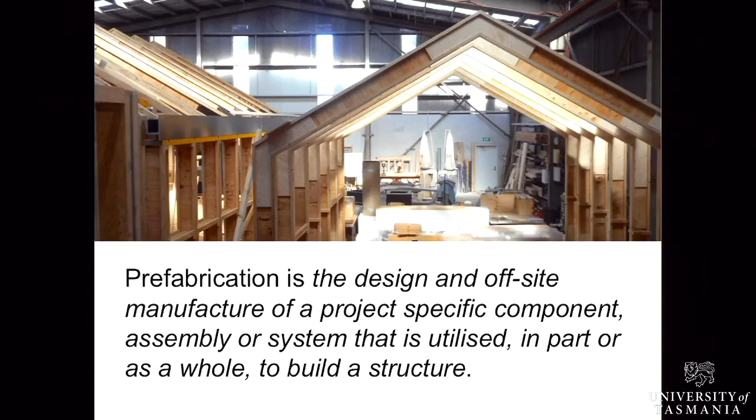So I think as we start, I'd like to begin with a definition, and that is what prefabrication is. So it's the design and off-site manufacture of a project-specific component, assembly or system that's utilised in part or as whole to build a structure. Now, a key thing about that is that it's done off-site. So you're not making it on the location where you're going to use it. Being built off-site means that you have greater potential for quality control. It doesn't mean you'll use that potential, but you've got it, because you can do things in a controlled environment.

You're making the piece to go into a project, so it's not a commodity. It's not like a piece of plywood that you buy at the shop or a pack of pine. It's something where someone's made a decision and cut a component that can go into your building. That also implies then that it's more precise than what you've got in on-site construction, because you're making it to a size that's determined by the design, and that you're then transporting that thing from some location where you've made it to the site where you're putting it together and putting it in place. Now, you may make parts of it in one location, assemble it near the site and then lift it up as a component. So we can look at some of those things as we progress through.

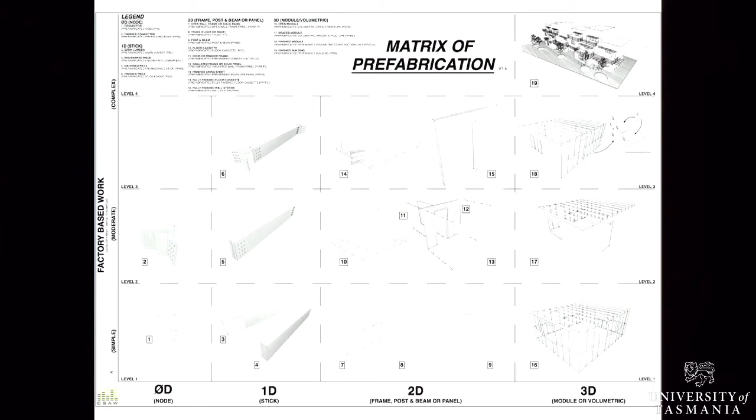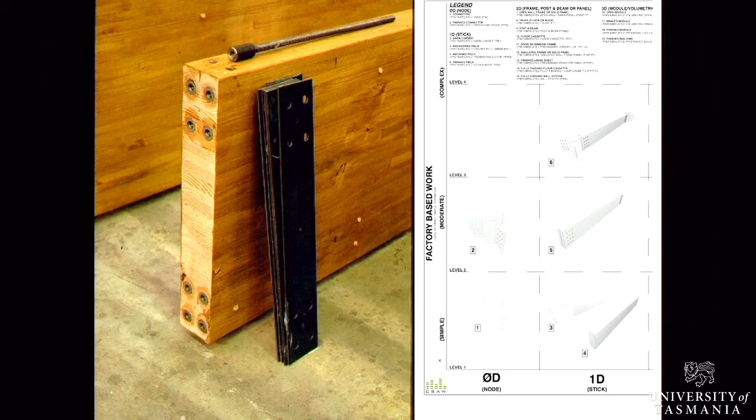So if we just look at some examples, this is a 1D element. This is a prefabricated glulam element that actually ended up in a building built for the Sydney Olympics. It was all cut to size, perfectly arranged, arrived on site, and then was just bolted into place. These are 2D elements. These are ganged nail plate trusses put in location in the School of Architecture building. So you can see that that's a 2D bit, and all those 2D bits are then made into some 3D arrangement.

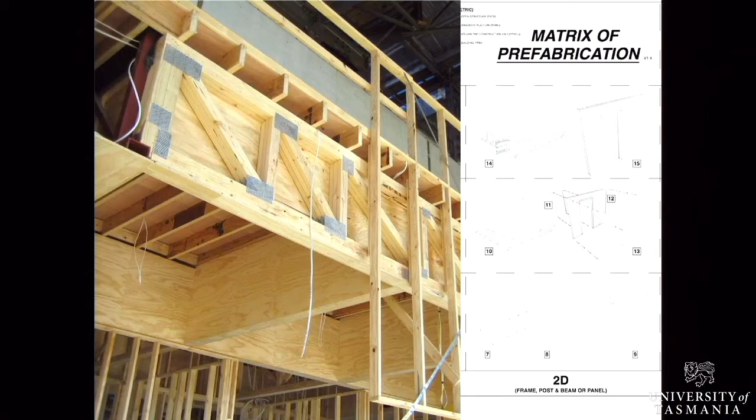And this is our volume. So this is one of the modules designed for the NRAS project. This is the prototype. It was manufactured and tested. We drove it around, and this is it being loaded off. So this is the type of thing we can fit into this site.

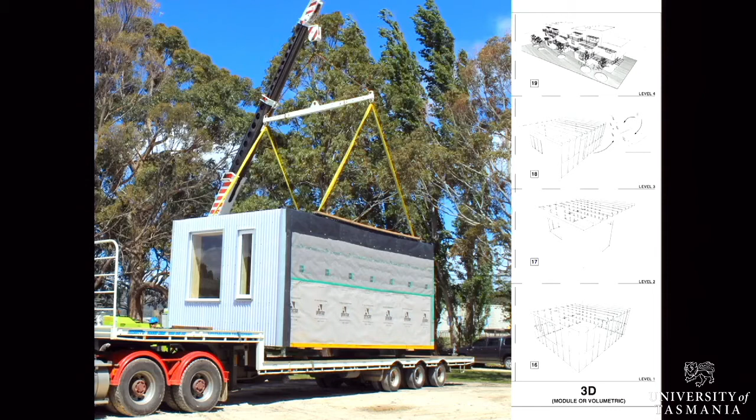Okay, so there's notable exemplars of prefabrication and timber prefabrication in Australia, but timber prefabrication is still a relatively underdeveloped art in Class 2 to 9 buildings in Australia. And that's one of the reasons to hold this seminar, is that we want to develop that art.

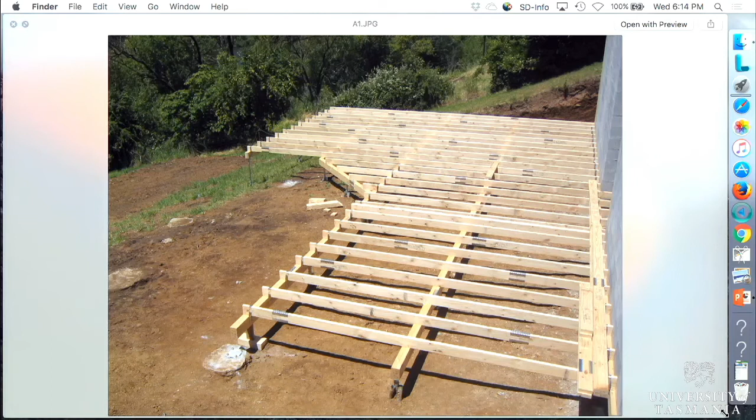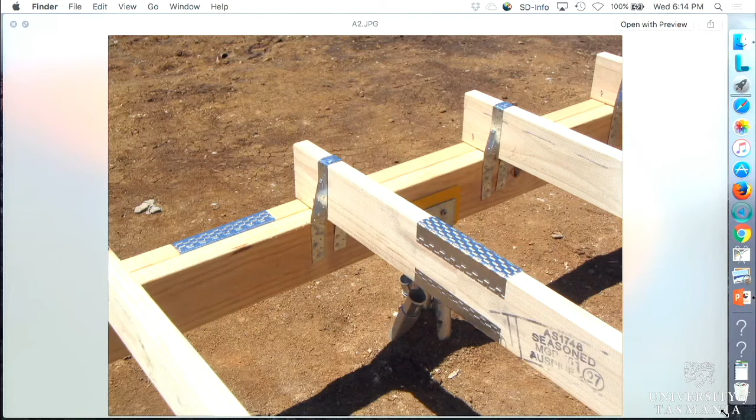I'm probably going to take you through the simplest forms and getting to fairly complex structures that we can do tonight. Basically, our simplest form of prefabrication is grabbing 2 sticks of timber and lengthening them. And this type of prefabrication has gone out the door because products like hySPAN and hyJOISTs, etc., have taken over from those types of prefabrication.

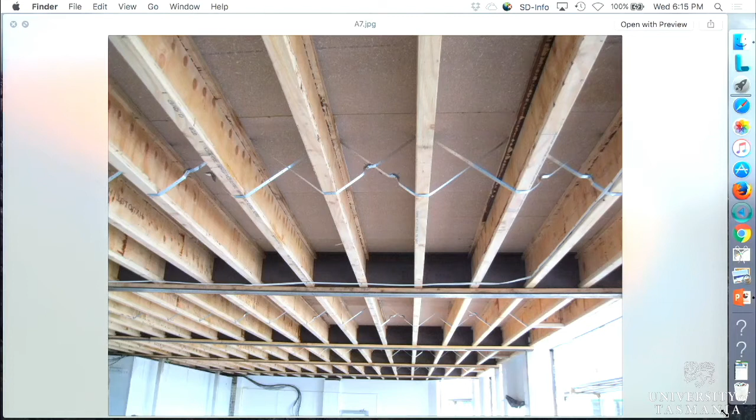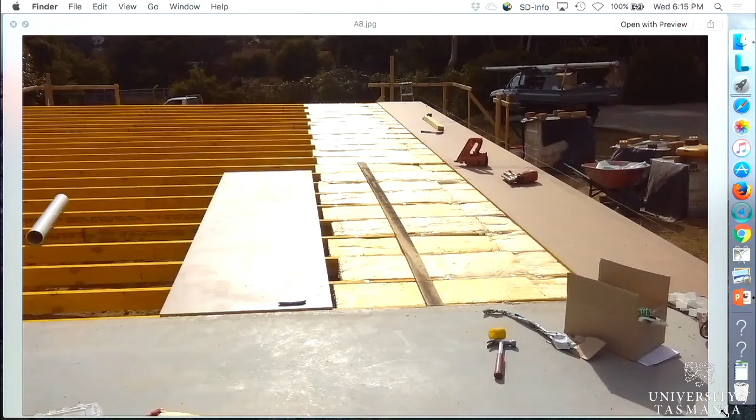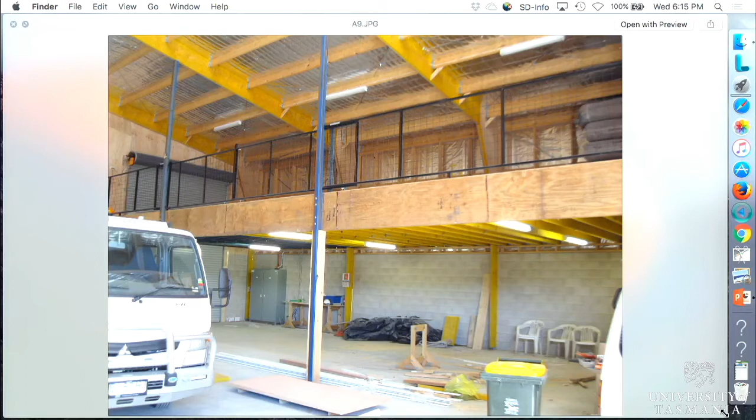And then we see on-site situations where you can either do this as a panelised and lift it into place, or make it together on site. Simplicity of continuous length members, such as this, with high span, and you can slip your insulation in while it's being constructed. And then we've gone to a storage building, and as you'll see there, we have fairly chunky pieces of timber, but that's also because we've got a lot of commercial loads on it as well.

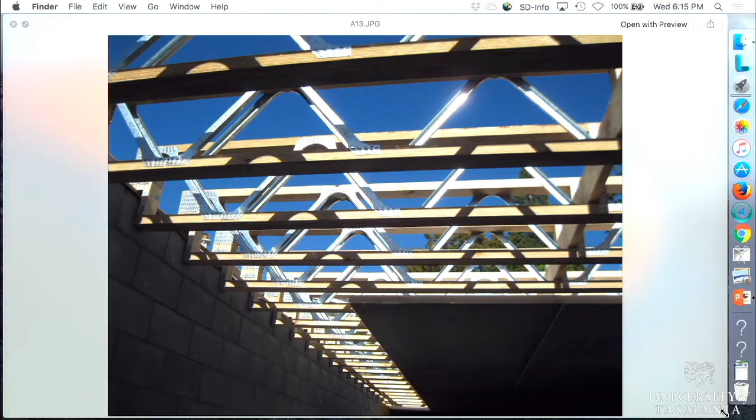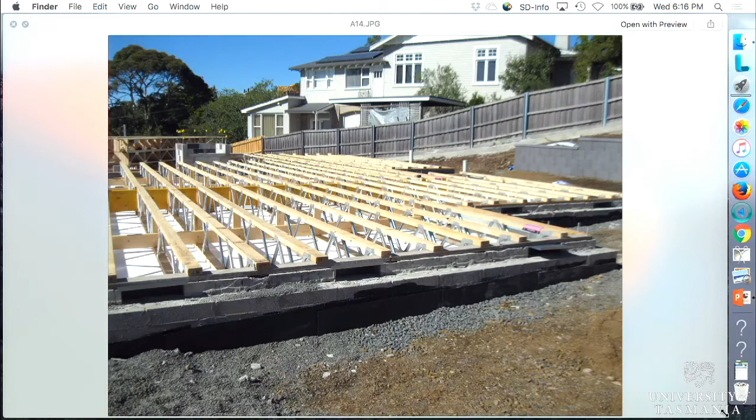And then we get to steel web floor trusses, which today are starting to take over from the timber ones. And the reason that they're taking over is a commercial factor, which is that they're around about $3 to $4 a linear metre cheaper to produce and place in the marketplace than the full timber ones. So I'm just calling out some of the realities of what we're facing every day with our customers.

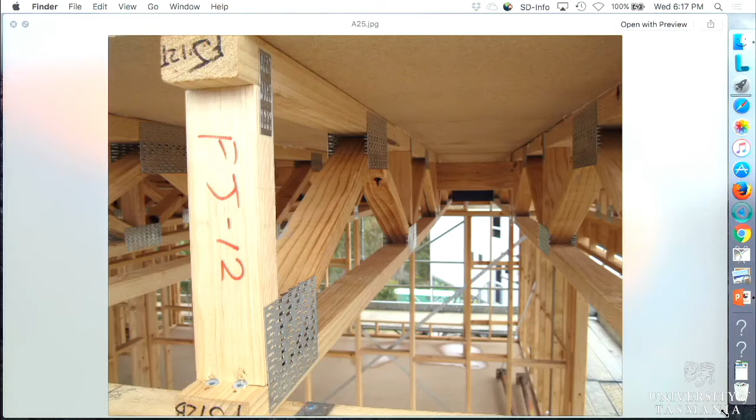And we also do floor trusses and put Hebel concrete floor panels on them, etc. So we take all of those types of things into consideration when we actually do the design. And that's looking underneath at a Hebel floor, sitting on timber trusses.

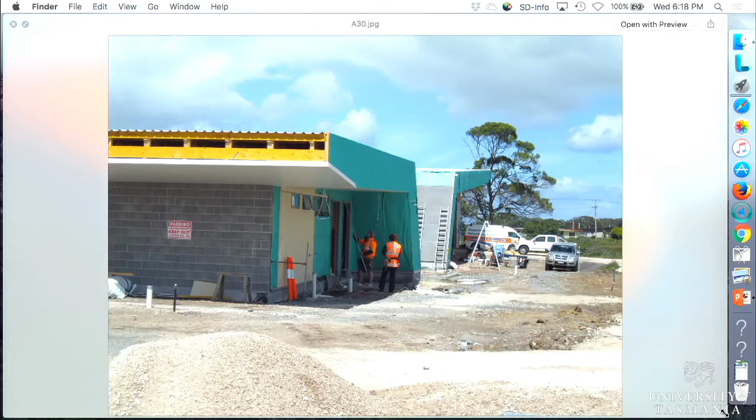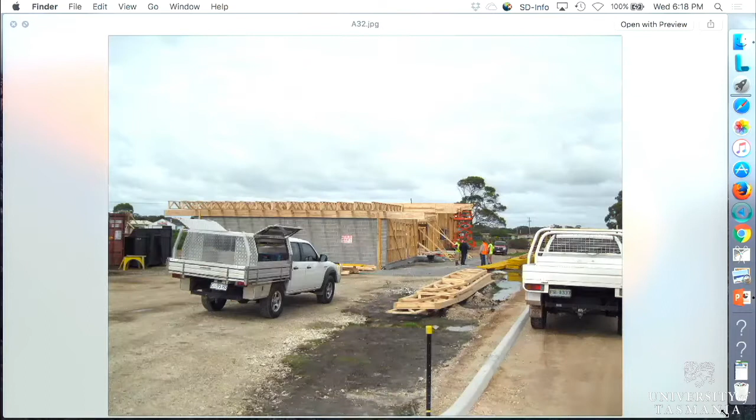And we also use them in roof structures. This was a building that we did out at Smithton for the School of Agriculture. At the rear end we had about a 3.5 metre cantilever of the roof structure, and that's that same area that we're looking at there. And on the sides we had a 2 metre cantilever, and this is the building while it's being erected. And at the front we had a 5 metre cantilever.

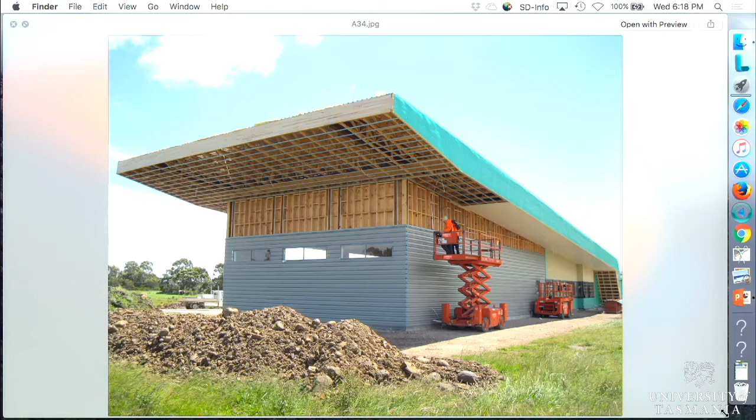And the beauty with these types of projects is that I was called in by the architect and the engineer at the design stage so that we could try to solve some of their design problems and give them solutions of how we could use the products that are available in the marketplace, and also put it together so it was doable.

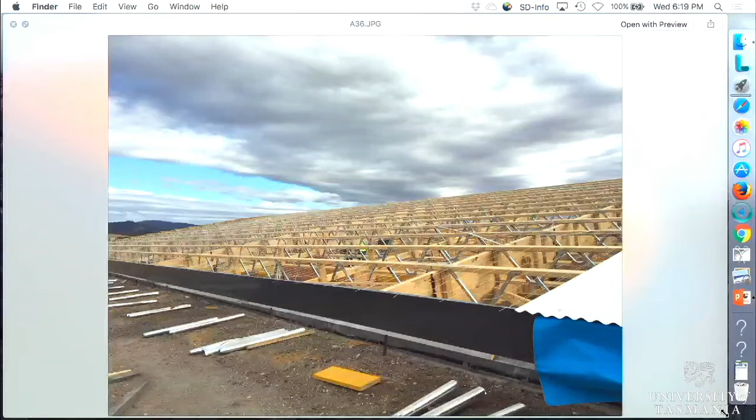There again, steel webbed floor trusses as roof purlins. And this complete roof structure was all done out of what we call floor trusses. They were spaced as purlins at 600 centres, and that's the end result. They obviously went across the building, not lengthways.

And then we also do prefabricated framing. And these are just some shots of prefab frames in situ in our projects, some commercial, some residential. Brace the hell out of it where it's required.

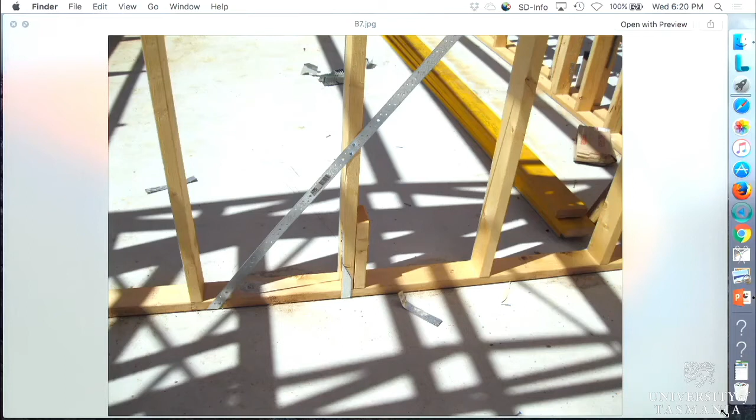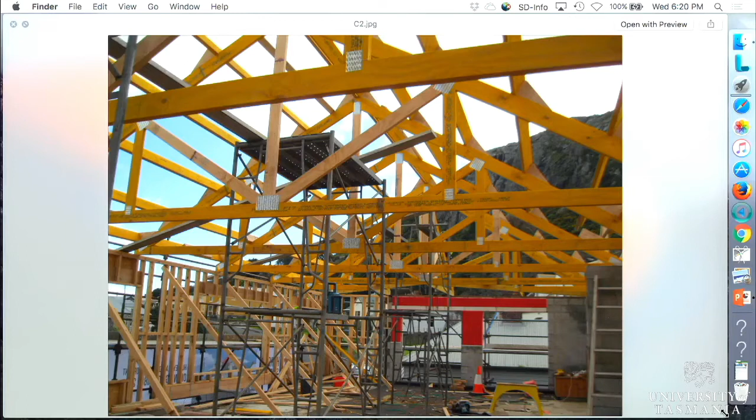Now we get into roof trusses. This is the Hursey Seafood up in Stanley. That was the job once it was completed. And this is it under construction. Basic high span trusses, painted up. The nail plates basically disappeared. That was it.

And we can do lots of complex shapes, scissor trusses, as you see in these photos. Complex roof shapes, stub heights on the ends of trusses, beam pockets so that we can hook onto beams, etc. Roof trusses coming into girders, which are then supporting other trusses as well. And complex ceiling shapes.

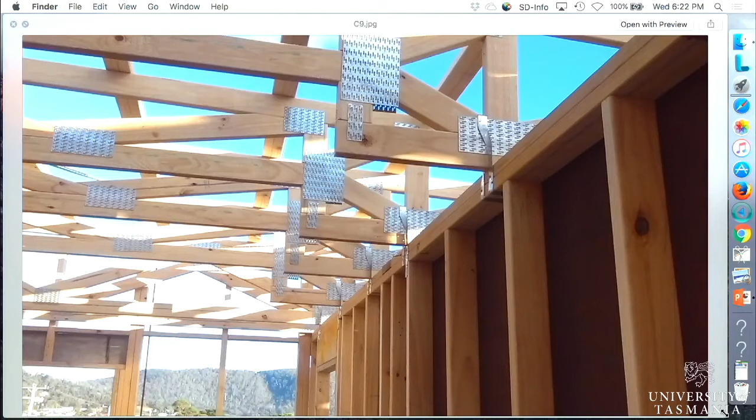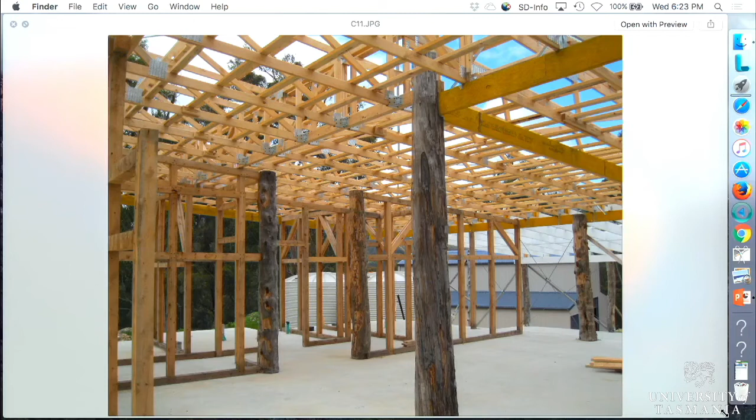This was a job that we did down the Huon, and you'll notice on the front left-hand side there was just a very sharp roof slope, and the architect had designed that to take solar panels. So we cantilevered those trusses out and applied the solar panel loads. So, cantilevers of 3.5, 4 metres with roof loads on them.

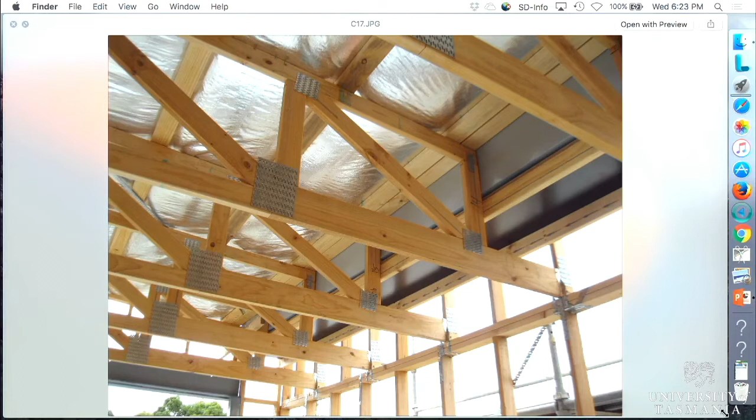Shape for box gutters. And you'll notice that on each truss we also have a nail plated upright so that the builder doesn't have a hinge joint when the cladding goes up. And he frames in between each truss to accommodate cladding. Just showing you some photos of what it looks like.

This is a building called The Shed in Bicheno, and you'll notice solar panels, etc., on the roof. And this is the building inside, and we had exposed high-span trusses spaced at 3.5 metres, and also no bottom chord ties.

And this is one of the things that I'm always fighting with engineers about. Generally speaking, they want bottom chord ties in at a maximum of 3 metre spacings, etc. But we've been kicking a few goals where we don't require them in these kinds of situations. It would have spoilt the look of this building inside, I reckon.

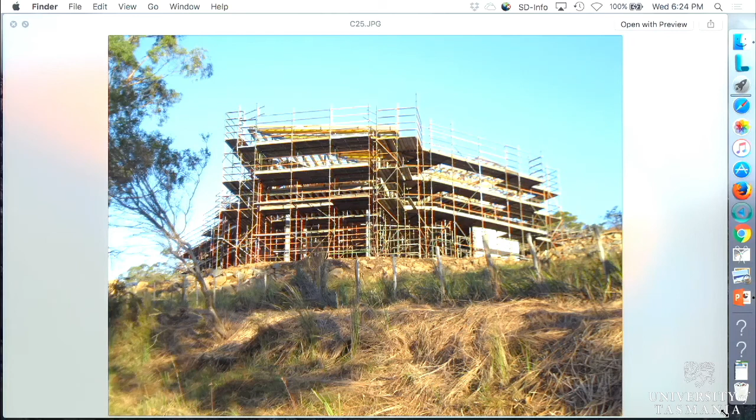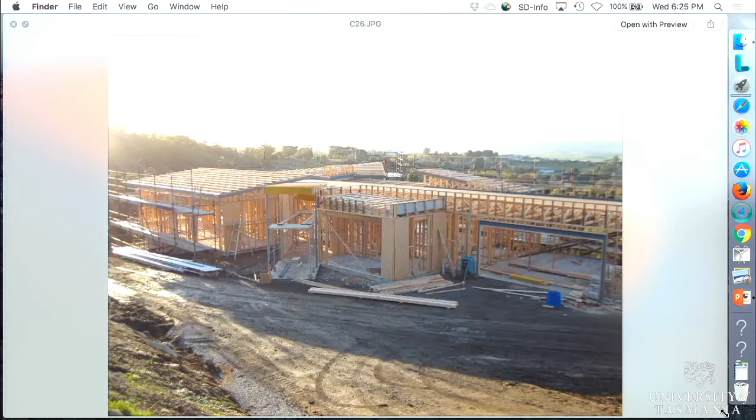This is a fairly large residential property that we did in Launceston. That's looking at the bottom end up. That's looking at the top end down. And you'll see there's a lot of different angles, roof shapes. We had box gutter sections. We had sloping ceiling sections, etc.

And as you see here, we've got a girder truss going along because there were a lot of windows in this building on the front, and they actually acted as a lintel for the roof support.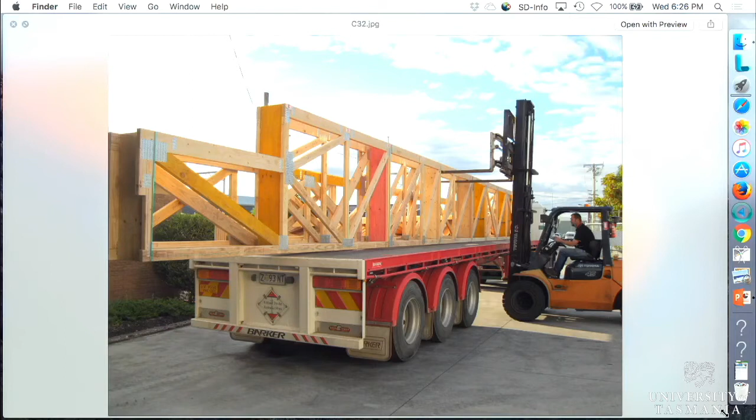Yeah, we'll get to that.

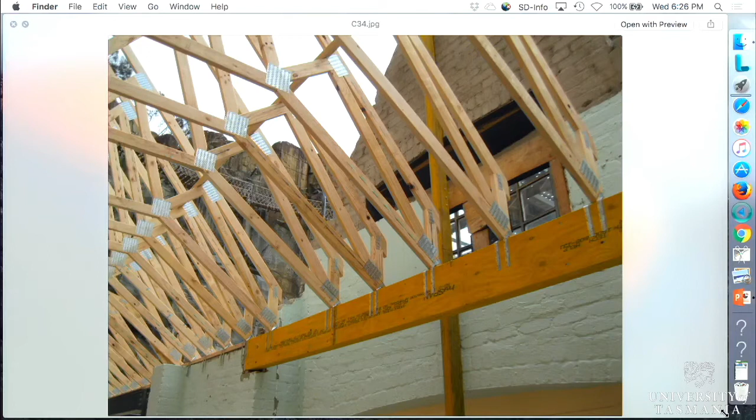Not a problem. This is the Penny Royal refurbished, when they basically pulled a lot of the old buildings down and reorganised it. And this was just a commercial job where we supplied the trusses, worked with the architect and the engineer on the design, what was achievable.

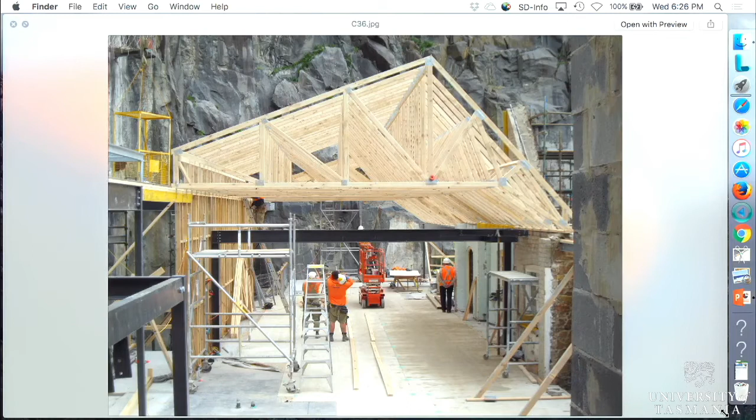If you have a look at the bottom chord slope that we have there. And fairly large openings in the roof onto a courtyard, and we just go around with girder trusses, parallel girder trusses, so we can achieve the shape that the designers wanted. And we get some weird and wonderful things that we have to try to manufacture in our factory.

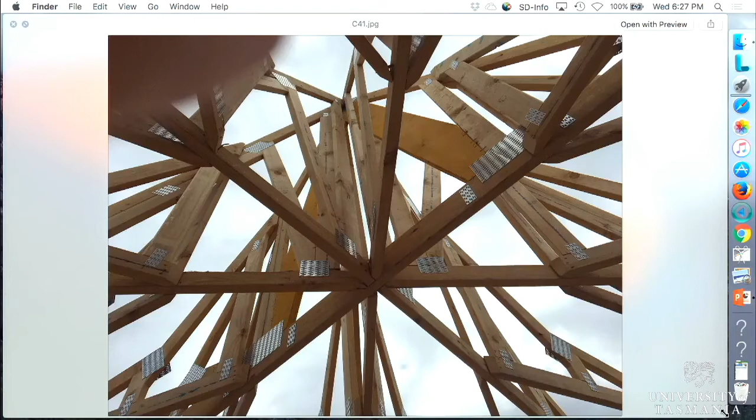Large cantilevers, and the striking thing about this was that, generally speaking, rule of thumb is whatever you cantilever, you've got to have twice the backspan, but we got Multinail engineers onto it, and we could do it. And I got the builder to jump up and down right at the end of that cantilever, and we had probably 1 or 2 mil deflection out of live load.

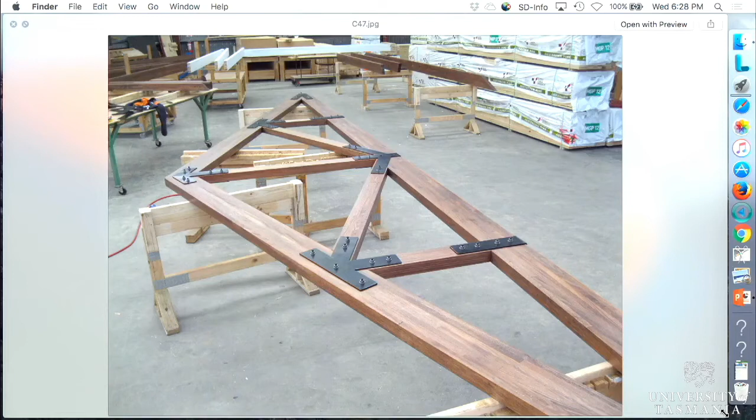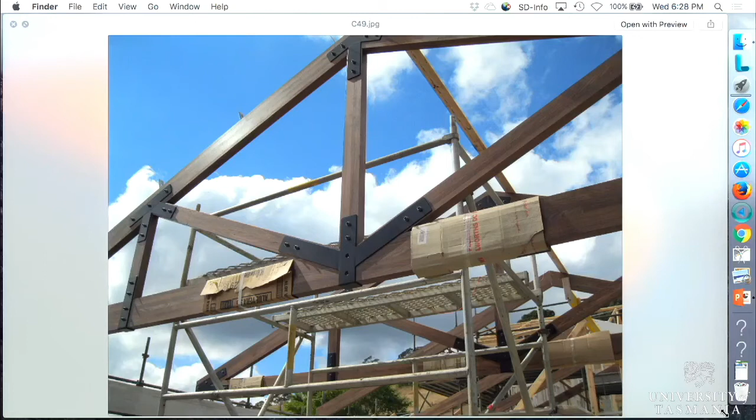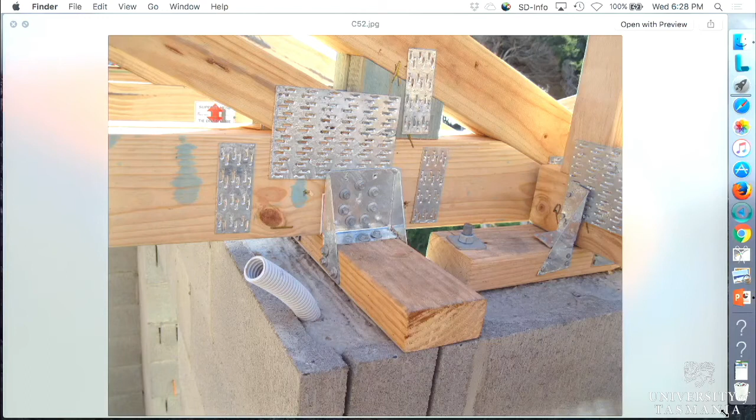Also do prefabricated dressed trusses. Expensive items though. Truss like that, you're probably looking at about $6,000 a piece. Trusses hooking onto large beams. Truss to truss connection with a truss boot. And then tie downs. You can see the different types of tie downs. You've got a heavy duty one there, and then you've got the multi-grip or triple grip next to it.

And then talking about prefabrication, trying to educate the building industry to consider, wherever they can, fabricating roofs or roof panels on the ground. This project was for a building called Chicken Feed in Legana, and I'm just going to give you some figures and sums. The builder estimated that it was going to cost him close to $100,000 to erect these trusses ready for cladding. And I said to him, I reckon we can halve it very easily. And he wanted to stay conservative, so he said, I'll allow $60,000 for it.

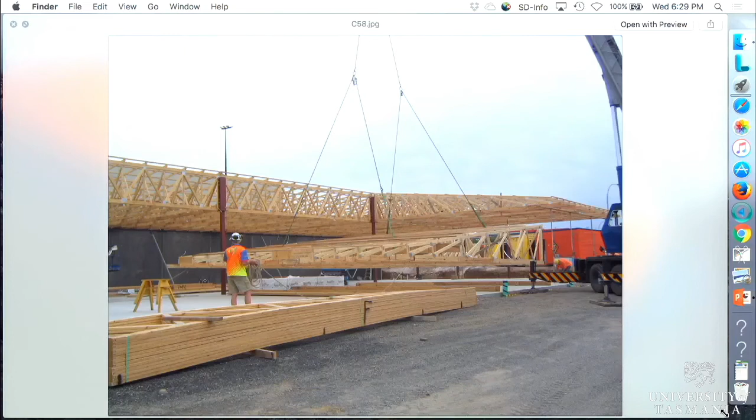And this is how we made it up in sections on the ground. And at the end of the project, I asked him, what did it actually cost you in total, with the crane hire and your labour and all the rest of it? He said $28,000. So, you know, sometimes it is a matter of educating your customers of how it can be done. How big was that area? I think it was around about 1,100 square metres. Yeah, plus occupational health and safety, doing it on the ground rather than up in the air.

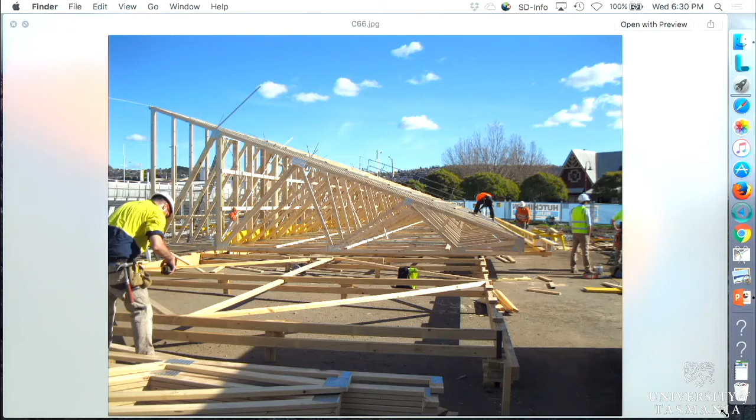This is the UTAS accommodation. Sorry, Greg, I'm stealing some of your thunder.

This was quite an interesting project because at the end of this, the high side of the building, we had an 1800 cantilever, and because it was 3 stories high, we had to allow for 19 tonne to be hanging off the end of the truss to accommodate the 3 levels of walkways that are going to be hanging off it. So it was very challenging, but in the end, it was fairly simple.

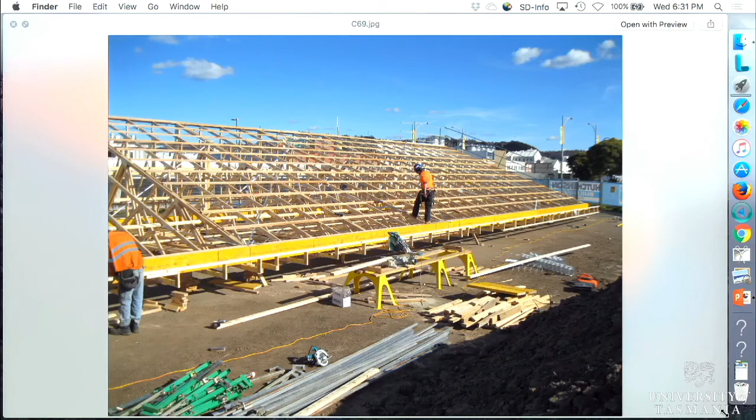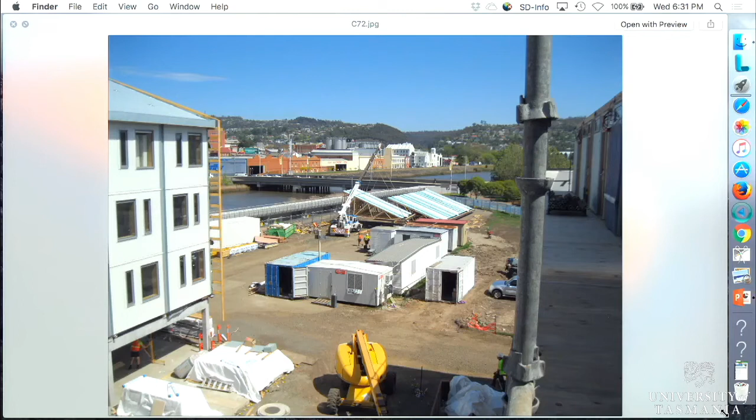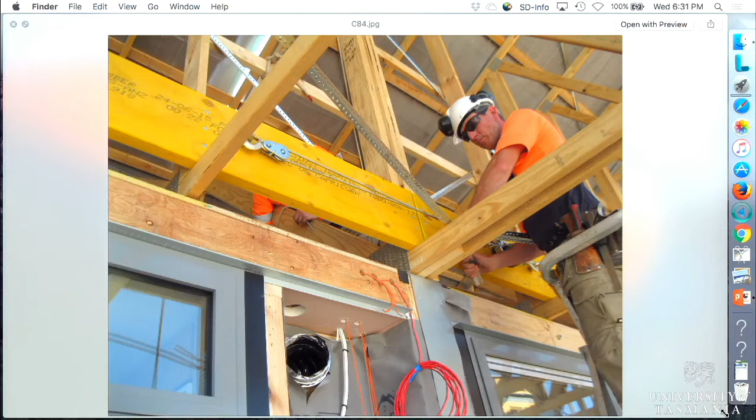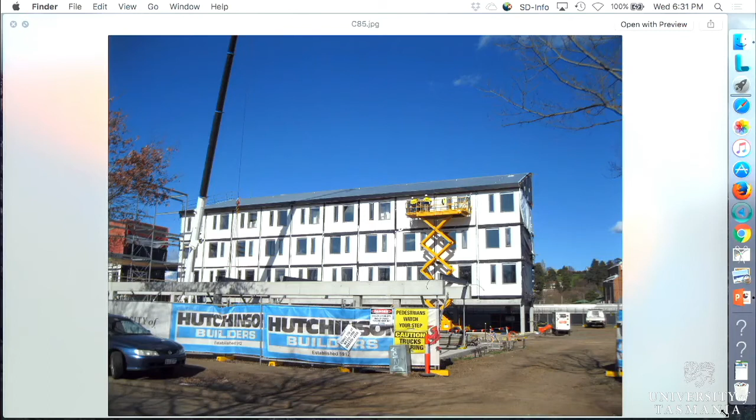So these are the modules being built on the ground, being lifted up into position. This is with the cladding on. Small crane brought it round from where they prefabricated it on the ground to a position where the large crane then took over and lifted it up into position. Then to make sure that it was a nice, snug fit, it was ratcheted together against the first module. So basically you could say 4 stories off the ground. From an occupational health and safety aspect, it was a good result.

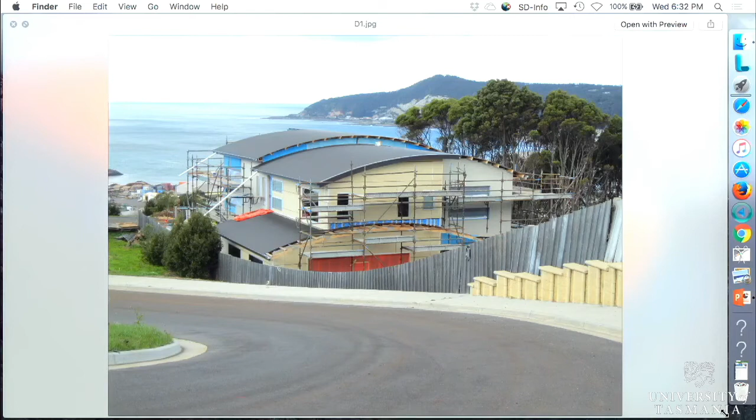Talking about curved roofs, we don't actually do curved trusses. What we do is that the top chord is segmented and the roof battens are put in at 1/4 of the panel distance every time, and that way we can get a perfect radius as you see there. Sorry, going the wrong way. Can't remember.

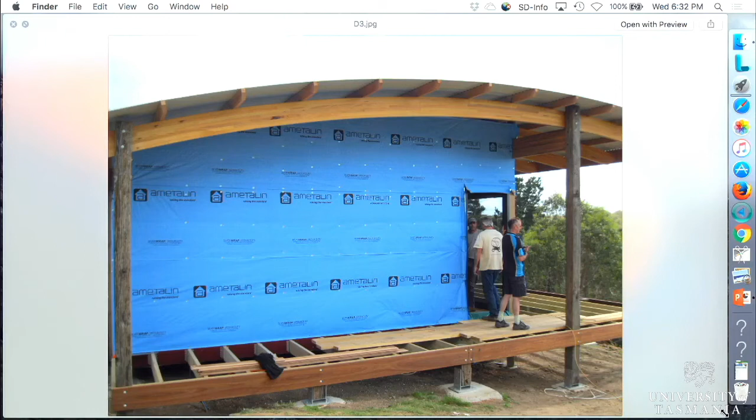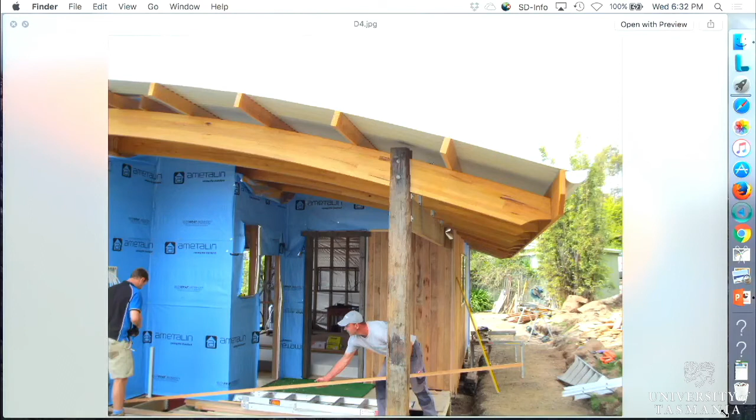Curved beams. We don't actually fabricate them, but I do source them for customers and clients. Where I source them from? Yeah, from either Melbourne or Brisbane. Okay. Yeah. And some of them want to turn them upside down.

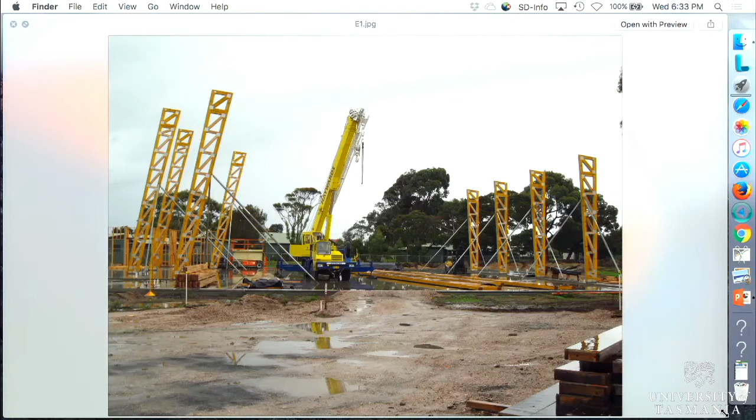Getting back to trusses, this was a project that we did in Port Sorell for the Port Sorell Community Centre. The largest span across there was 28 metres. The original design was done out of 900 by 135 GL18s, but when we actually tried to source product, because they had to be in one length, it wasn't possible, because the longest length we can get is 16 metres.

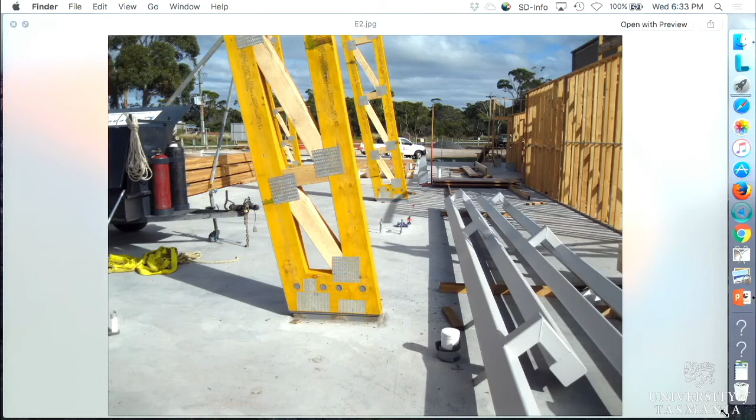So I suggested to them to consider doing it in trusses and applying plywood, and we applied a 15 mil layer of plywood, which gave us the 2-hour fire rating that we required, and from there all the rest was done in 1200 mil deep parallel trusses. This is in our factory, manufacturing them.

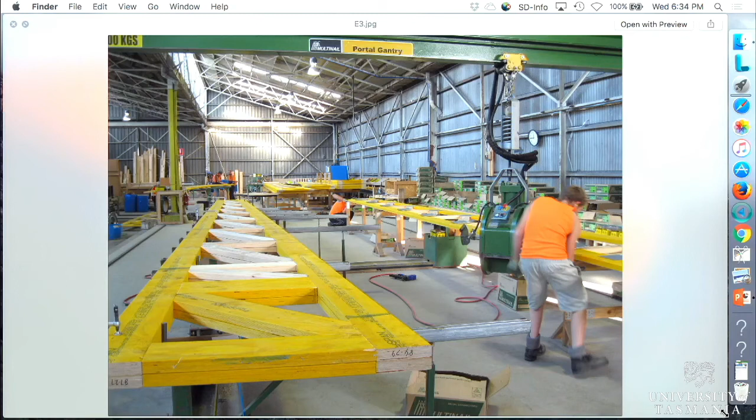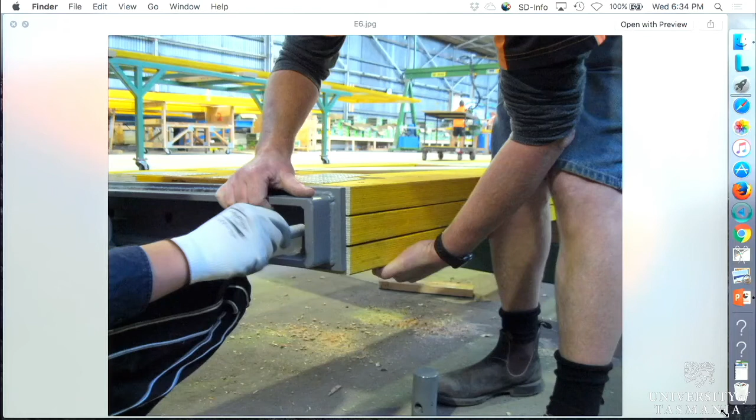This is the base plate that we concealed in the bottom of the columns. There were 3 layers of 45 mil trusses, and we had these steel dowels, and those steel dowels then accepted a bolt which we set on the base plate. These are some shots of the building as it was going up. So a 28 metre long rafter with 15 mil ply. The ply did help structurally, but was basically there as a fire rating.

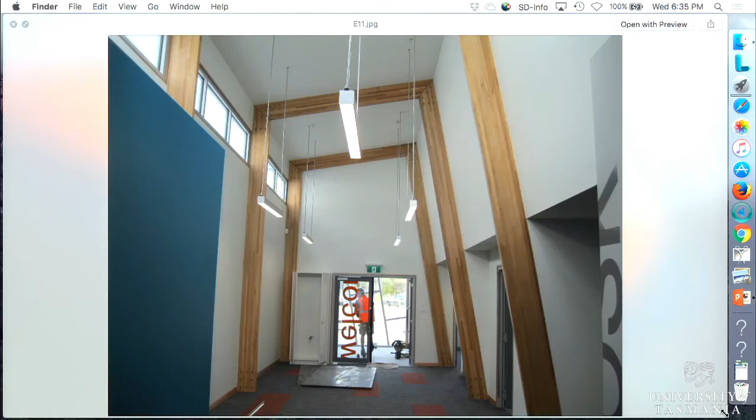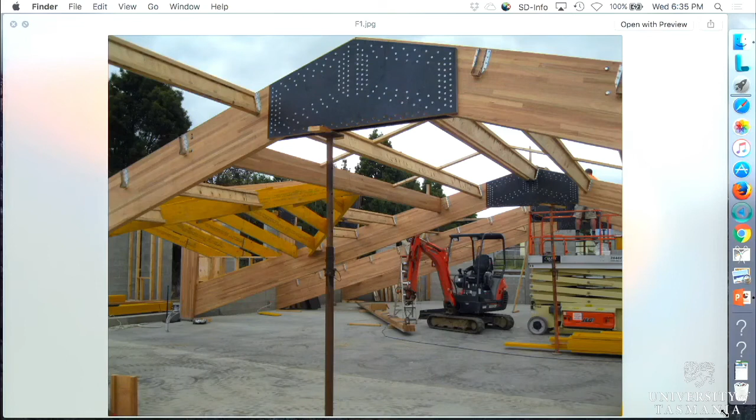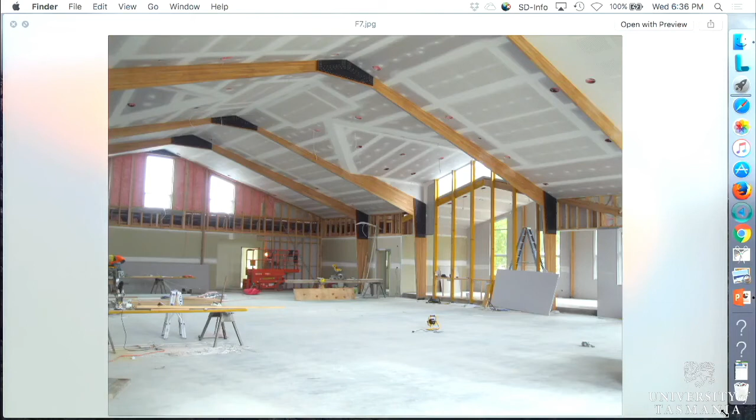We also did a church down in Ranelagh a few years ago, and there again we prefabricated much of it on the ground and then it was lifted up into position. Just showing you some shots of the same position to give you an idea of what it looked like completed. That's our steel, the 50mm steel dowels going through, and then obviously they're bolted from underneath. We do that type of thing in our factory before it goes out.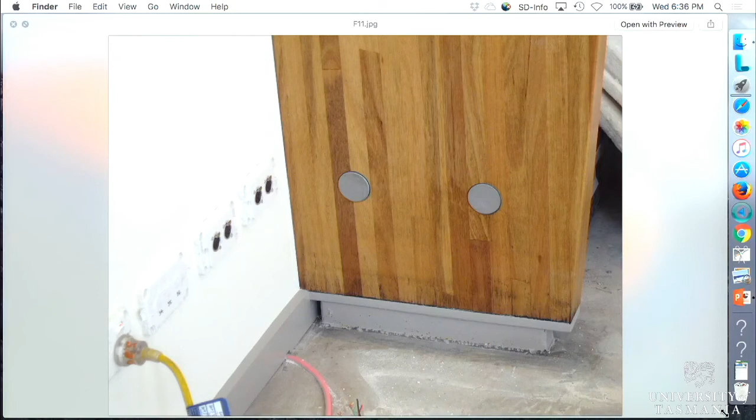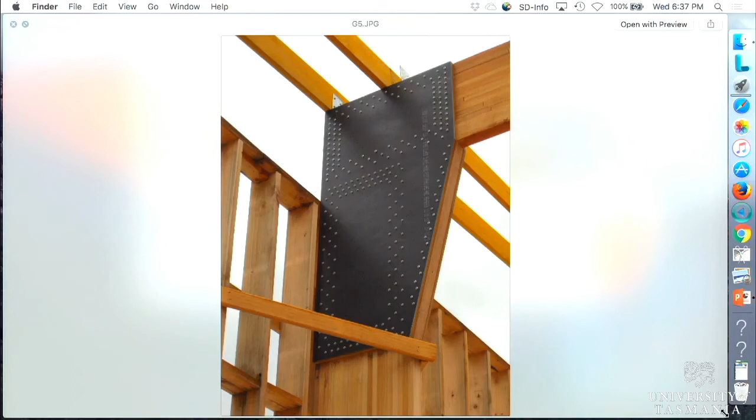Pool cover for St Mary's District School out of hySPAN, and it was just painted up to give it a bit of a non-industrial appearance. This was for the Bridport Community Hall. We started off with an 8 degree roof pitch on one end of the building to an 8 degree opposite roof pitch at the other end. Heavy plywood gussets, 32mm thick, F27, and just a screwed connection. There was an 18-metre span across that building.

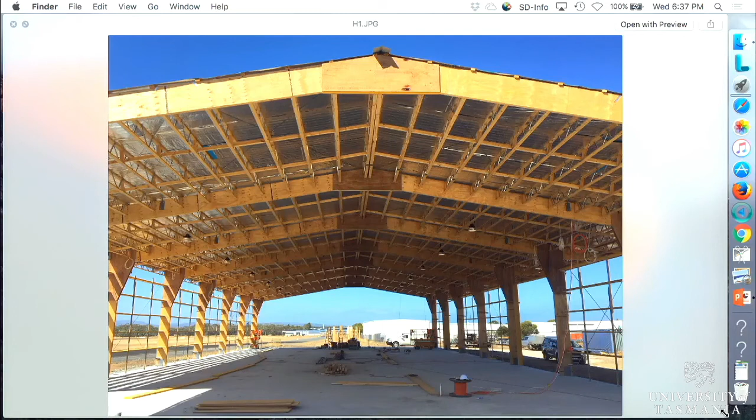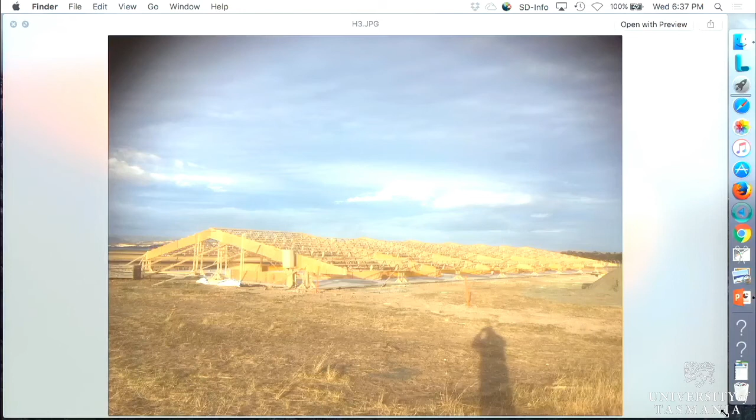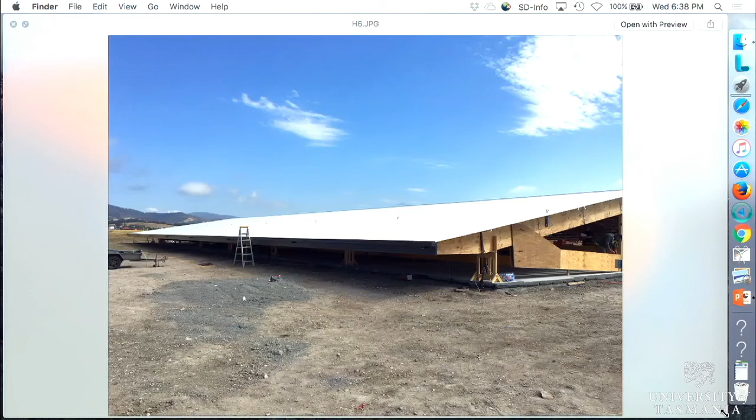This is our new factory that we're currently building down in Cambridge. We got all the components together for the walls, laid that out on a grid line on the floor, and then we built the roof structure over top of it. Just to give you some shots and ideas of what we've done here. We've put the roof cladding on it, and you'll see that the column is hanging off the actual rafter of this portal frame.

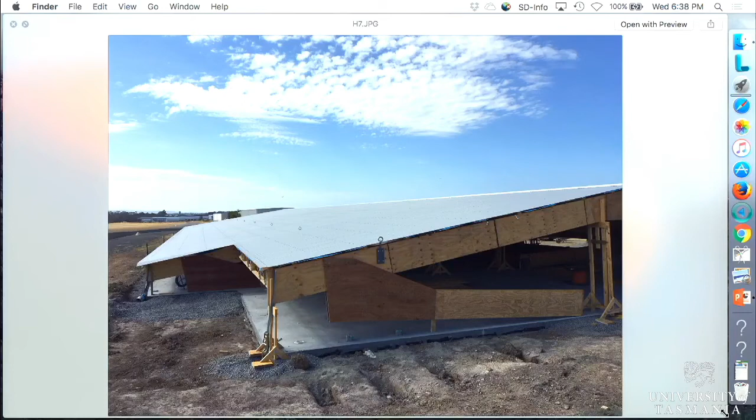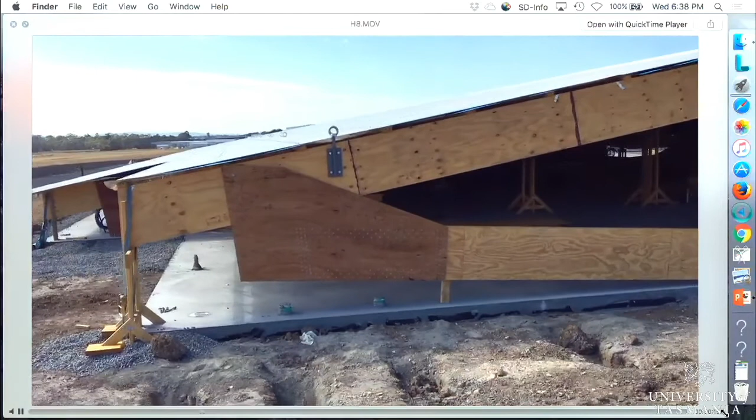Is there any cost comparison, commercially, to steel? It's very hard to know exactly, but from around 15-metre span up to 24, 25-metre span, I know we can be very competitive with steel. On some projects, on a building this size, I'll be $30,000 or $40,000 more economical. And on others, when they find out that I'm competing against them, all of a sudden their steel prices drop.

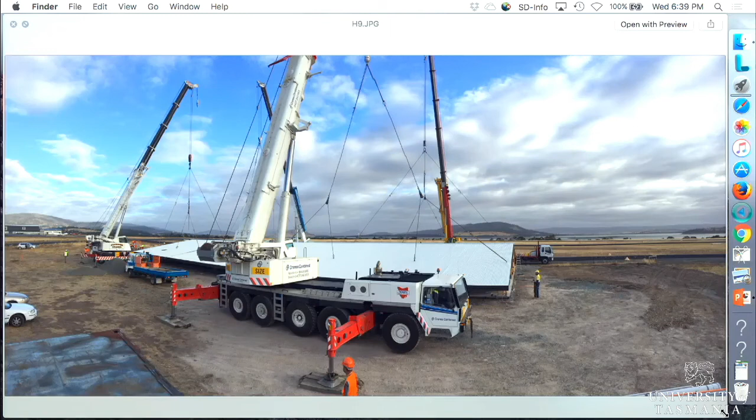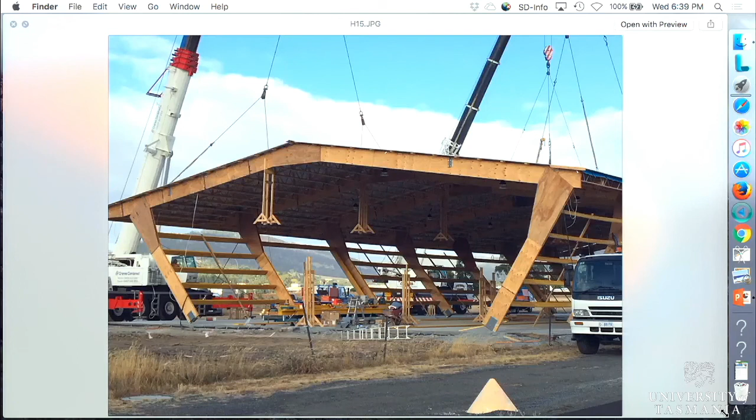So this is a little video of before it was lifted. The next morning, 6 o'clock, the cranes arrived on site. Some shots of it as it's being lifted up. They arrived at 6 o'clock in the morning, by 1:30 the last crane drove off site and the building was standing. This is just a short little video of the actual lift. Yeah.

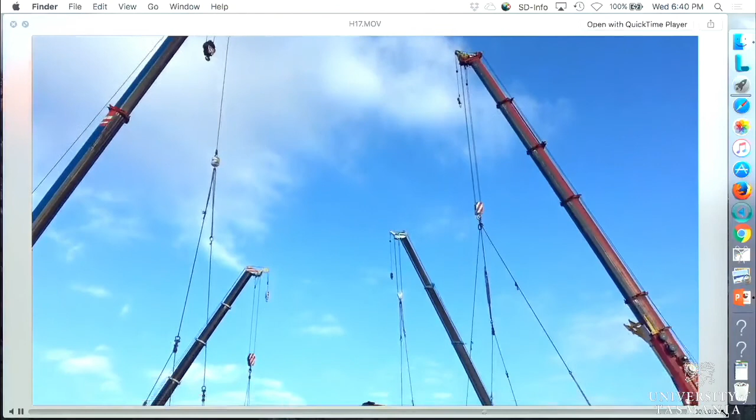The builder who's actually doing it for us reckons he probably saved himself $20,000 on labour, considering the scaffolding and all the rest of it that he would have required. The cranes were $8,000 for the day, but when you consider occupational health and safety, how simple it was, it's a little bit of planning beforehand.

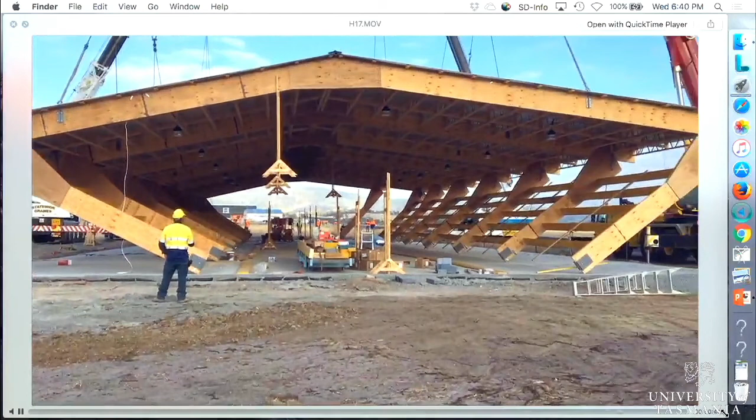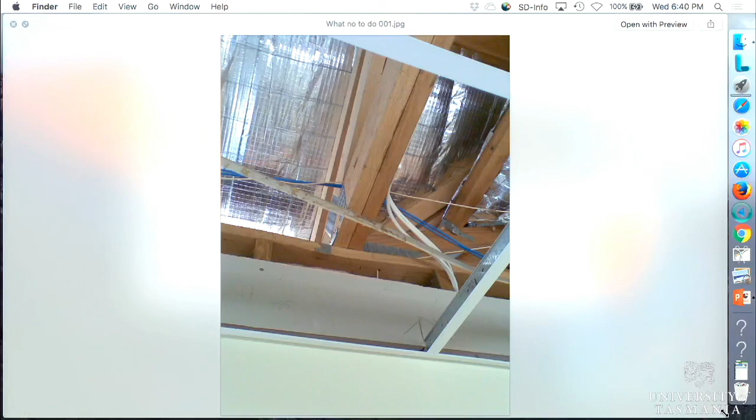We did the site measure on a job where we had to do an extension to a building. This was a girder truss spanning about 10 metres, and it was carrying about 10 metres span of other trusses.

Can we blow in on this at all, Greg? Sorry, Fred, no. Okay.

But a single plate, and the top plate of that wall had a rather large fracture in it. So my suggestion was that the builder put a Acrow prop under there straight away and make sure that there's a couple of load-bearing studs underneath it. And basically that concludes my presentation.